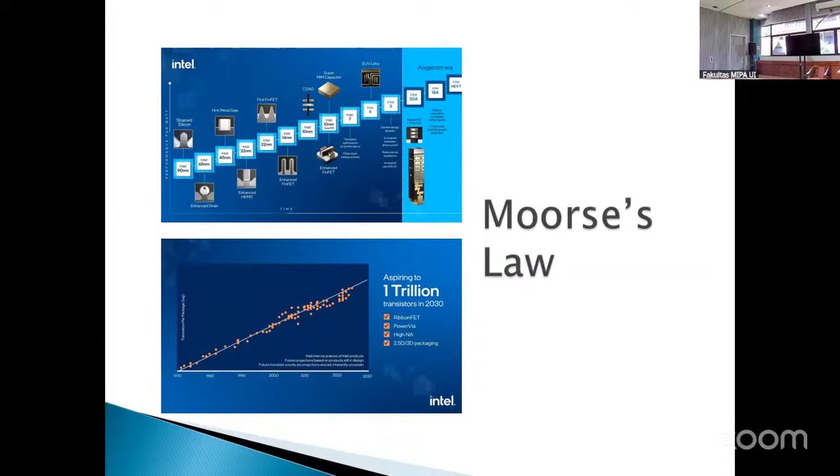That means you need to switch off, then switch on again and let them cool first, right? That's why we have many cooling devices sold in shops. They have a fan blowing from the bottom and so on, to cool down, right? This is the problem we face when you have more transistors in one tiny package. This is what I'm going to talk about today.

As we compare this trend, this side is temperature against density - how much transistor to put in our electronics. Normally we go to 100 watt per centimeter square, but nowadays the power of the processor is more than 100 watt per centimeter square.

It's really high, and comparable to a nuclear blast if the heat is concentrated in a tiny area. It's too hot, that's why we need to manage it. Without managing it, the processor will not stand long and will be easily damaged.

These are the challenges and constraints when we talk about thermal management. We have heat flux in the chip and our equipment increasing tremendously because everything we need is fast. If it's a handphone we need fast, we need a bigger watt power, for various applications - not only in a computer but in a handphone also we can feel that heat generated when you use it, or talk for so long.

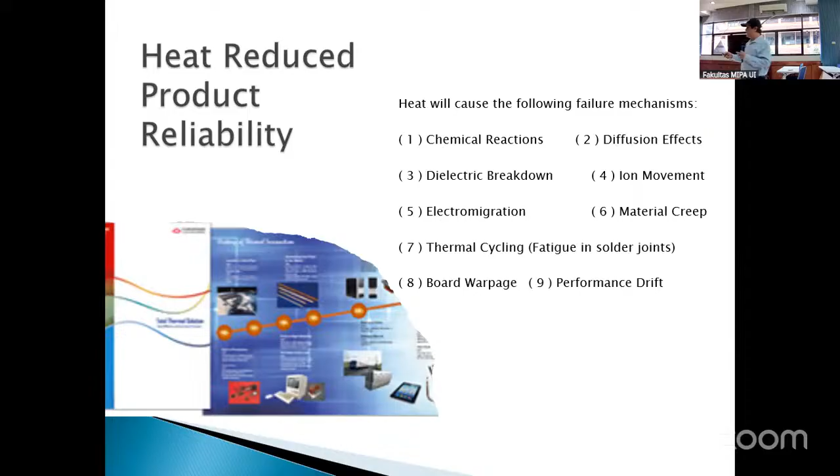And then performance will drift, performance will drop, right? That's how cost is affected by the heat, right?

And then these are in terms of equation, and we call it reliability is 1 minus F. F is what we call probability of failure, right?

Depend on time. Depend on time, the longer it runs, the product will become less healthy until it collapses, right? It fails, right? This is similar to us also, right? We also depend on time, right? When we grow until old, we also collapse, right? This also happens to electronics.

Okay, these are the relationships, these are reliability. It is e to the minus lambda. That lambda is based on activation energy, right?

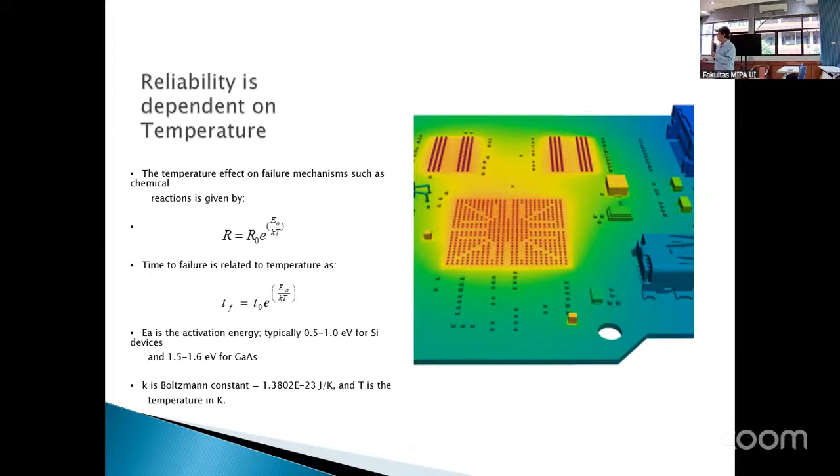This is how the exponential formula works, given by this formula, and these are failure time, time of failure, time at the beginning, and there is EA, and K is the Boltzmann constant - sorry, Boltzmann constant - and this one is activation energy. And then because of chemical reaction, this one will be reduced in terms of time, right?

Okay, all right. These are thermal management. Thermal management is very common in electronics, because we are very lucky - in Penang they have many electronic industries around. I think in Penang about 90% of industry is electronic only. Therefore, a lot of issues are shared with us so we can understand how the problem develops, and then we can contribute some input to them on how to solve it.

All right, this is how it is. The technique is enabled to remove heat from the microelectronic device with or without the need to apply external energy to do this, especially when we try to develop a system. It's possible we want it to be simple and free - free meaning we don't need to put so many parts. That means we have a simple technique, then we can have a low cost in terms of cooling, right?

These are most important. But it's not easy because certain products have different power. Anyhow, you need to have a proper, more expensive system to cool, to drop that - I mean to remove the heat, right?

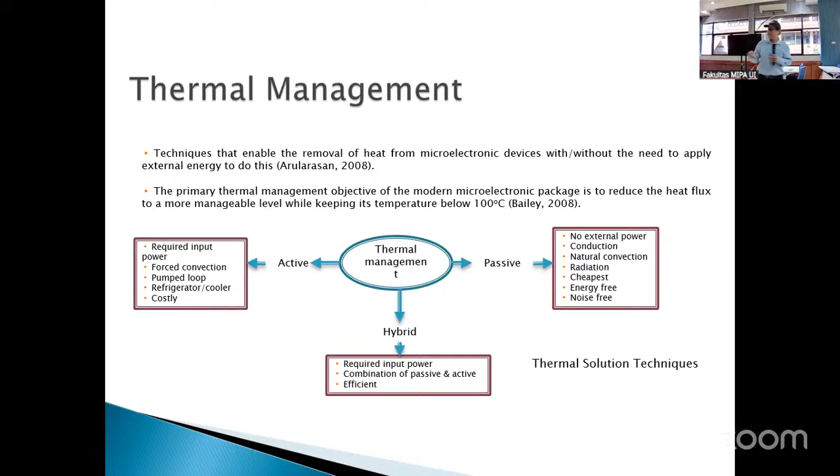All right. Heat transfer and fluid flow in electronics. This we cannot run away from. When you are involved with heat transfer, you must have a fluid inside, right? You must have a fluid involved. Without fluid involved, it is very difficult for you to control the heat, right? Okay.

Cooling of electronics is a heat transfer field that invokes all areas of heat transfer such as these. I think you learned them, right? In physics also I think you learned what natural convection is. These are very simple concepts of heat transfer, right? And then we have fluid flow, pressure drop, extended surfaces, like a fin. A fin we call an extended surface, right? And then we have sensing techniques, empirical data analysis, numerical and computational methods, and heat exchanger design. These are all what you need to know when you are developing a cooling system, right?

All right. Thermal issues. Heat is empirical. You can calculate. It can be calculated. This can be empirical, and thermal prediction within equipment is a difficult task, right? To predict a very complex system is very difficult, right? This is the issue, especially when you have complex geometry, bends, non-uniform component sizes and layout, non-uniform board spacing and heat dissipation, and non-uniform flow and velocity distribution within equipment. This is difficult when it becomes a complex system, right?

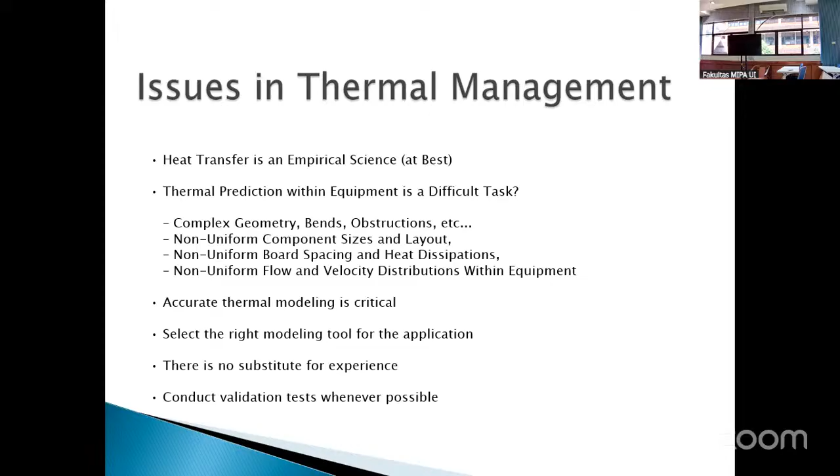Therefore, calculations are very tough. Manual calculation is more difficult, right? Accurate thermal modeling is critical. Therefore, modeling is very important. Simulation is very important nowadays. That's why in electronics they rely heavily on simulation, right? Simulation means using software. And then select the right modeling tool for the application. There is no substitute for experience. Experience is also very important. Use experienced engineers and conduct validation tests whenever possible. You can validate your simulation also, right?

Okay. All right. Thermal issues: we have a cooling system. The cooling solution depends on factors such as heat flux, like I said just now, power consumption, space, weight, reliability, mobility, integration, maintenance, noise level, and cost, right? All those are important when we design. Consider how big the system is, how constrained your device is when put in the enclosure or whatever, right? That is all important. Operating costs are also important, and we need to look at them.

And then how much the build cost is. It cannot be too expensive, because if it's too expensive, your product goes out of the market. People don't want to use it because it becomes expensive, right? And then product lifetime is also very important. Make sure it's longer. And then we have consumer acceptance. People must like it. The outlook must be nice also, right? This is what the engineer needs to consider and take care of. These are thermal issues that need to be designed properly to make a proper thermal solution, right?

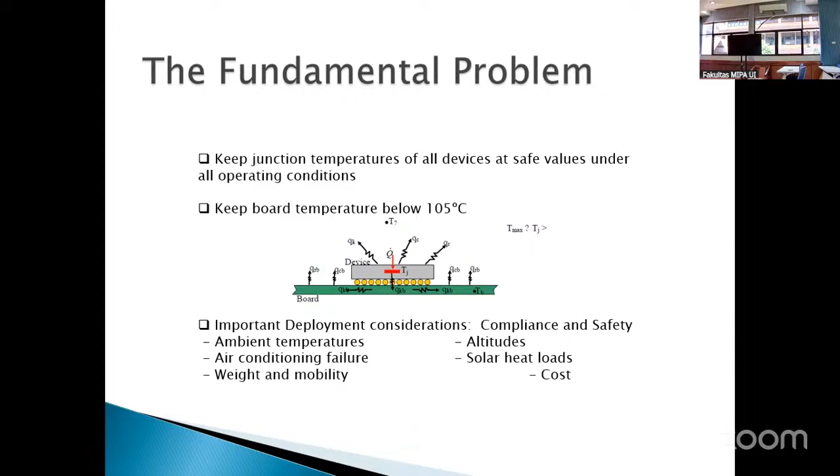This one. This is junction temperature through Q1, right? This is Q2 through the board, right? This is how we need to calculate this.

And the most important thing is it's often difficult to separate the amount of heat flowing through these two parallel paths. To overcome the difficulty, we define the net thermal resistance, the thermal resistance from the junction to ambient. The formula is: thermal resistance equals Tj, temperature of junction, minus T ambient, over P, the power of the package.

If you know that, then we know the total thermal resistance of that particular package. This is how companies measure it. First, they want to predict junction temperature. After that, they will know the thermal resistance for that particular device. When they know that, we estimate how much cooling they need to reduce the resistance. Conduction and convection you have in parallel. I think you know, right?

For this resistance, we assume it is a Fourier-type equation. Therefore, you can make a resistance type of representation, right? This is from the junction, this is convection. This is how they represent the junction to ambient.

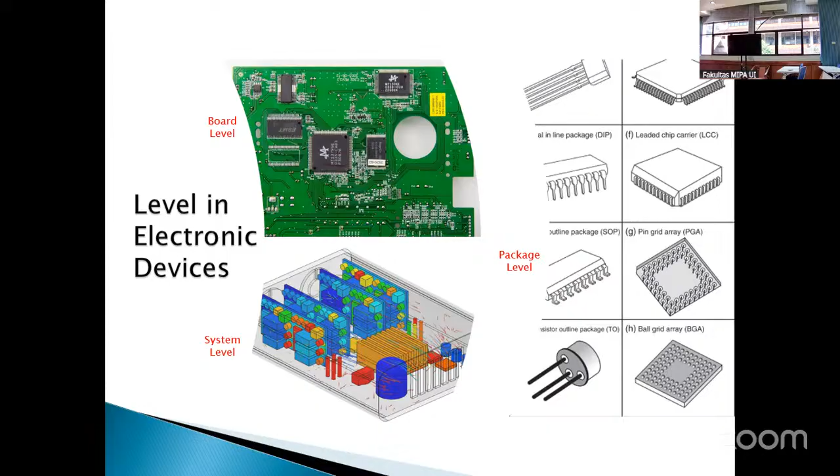Okay, I want to touch a little bit on what I'm doing in USM. These are some of my ongoing projects, especially the effect of heat sink, heat pipe, and reflector on PV solar cell cooling. And one of my PhD students works on experimental and computer simulation of multi-piezo fans with different configurations, which I'm going to touch on today.

And then experimental and computer simulation of synchronized piezo fans. Piezo fans can be synchronized to optimize heat dissipation. We also have a study on notebook PC cooling. Your notebook has cooling underneath; for high-power computers they normally have heat pipe cooling. There's a study on a fin loop heat pipe with nanofluid, the study on heat sink, heat pipe, and reflector on solar cell cooling, and lastly I'll touch on lithium-ion battery cooling.

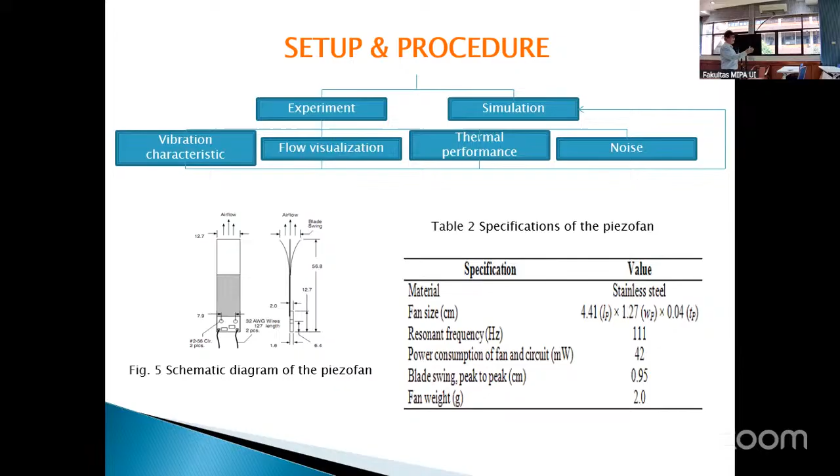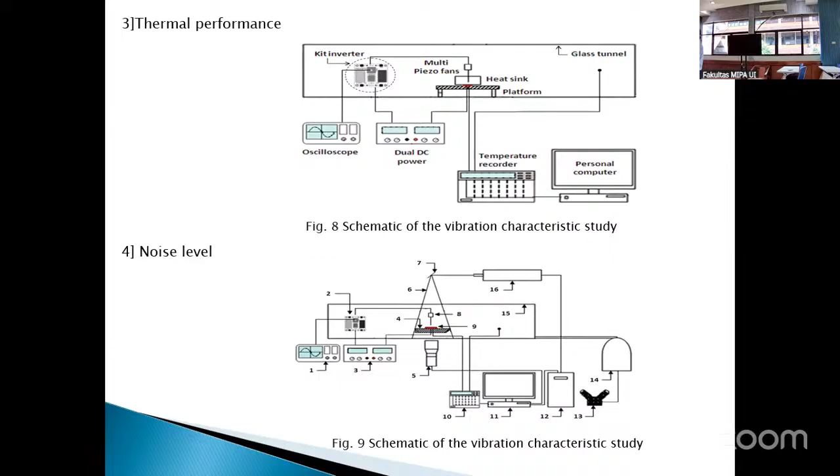Okay, and then we measure thermal performance, right? We have a temperature sensor, a thermocouple there on the plate, right? And then we also check the noise level with a laser vibrometer, to check whether the noise is as low as we require. We test this particular piezo because we want to know the configuration of the piezo, how big the flap, how many fans we want to use and so on.

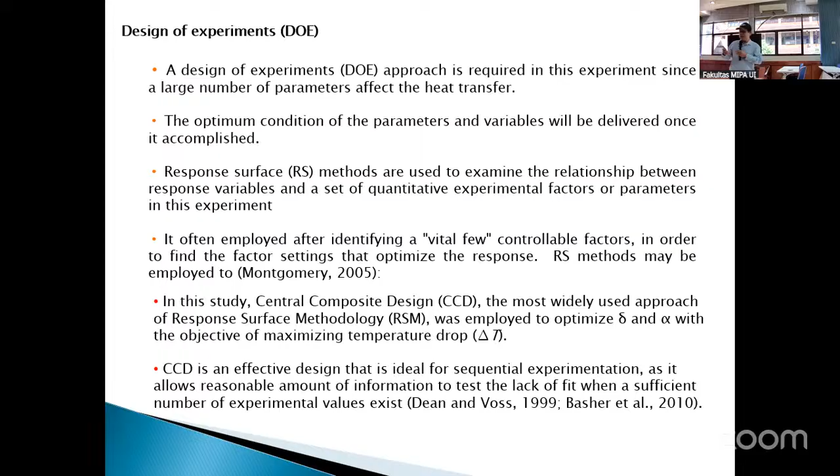Okay, we also do some DOE, right? DOE is an optimization technique, right? To calculate what is the optimum in terms of distance from the tip of the piezo to the surface, and then also what is the amplitude and so on, right? We can use this DOE to calculate for us.

All right, this is the formula we use, right? Basically, because we involve heat and fluid, we need continuity, momentum, and also, because the temperature is there, we need to have the energy equation also. And then we have solid mechanics, because it is solid, deformation and so on, so we need an equation for the solid. And because the flow is turbulent, we give a turbulence equation there, right? We supplied it inside Fluent.

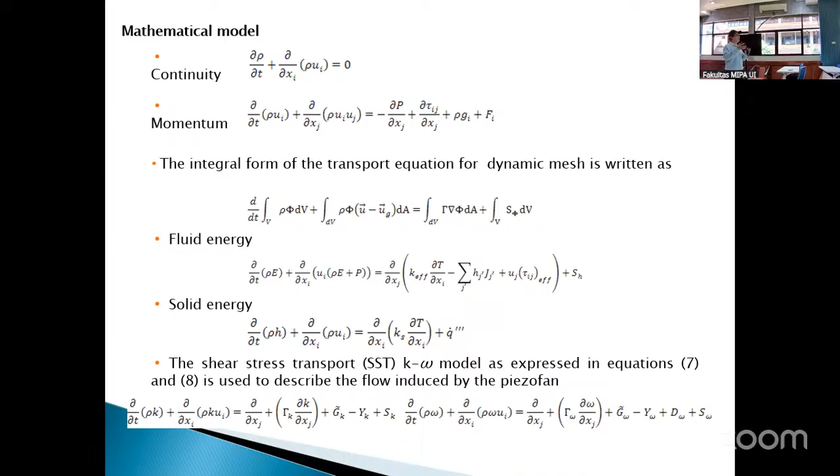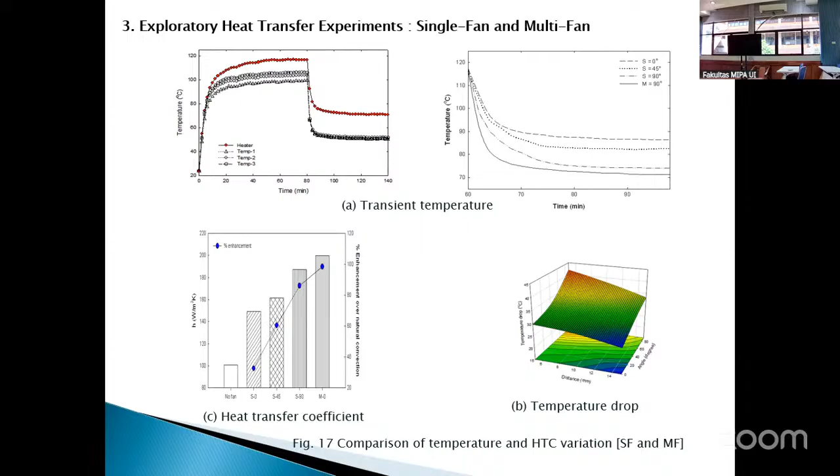These give the temperature drop at the optimum condition. Therefore, we do DOE, and then we can find what is the optimum. These are optimum for that particular setup. All right, this is the result we got from experiment and also DOE. We run the experiment and then we use DOE, and this is the optimum value we got, based on that setup, right?

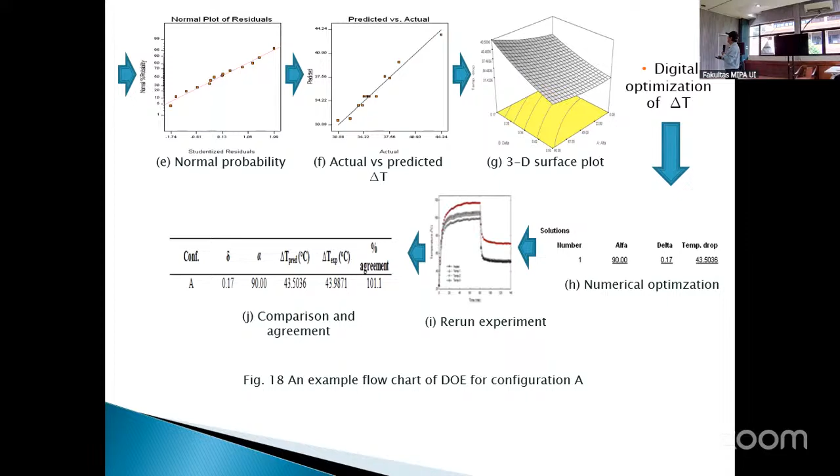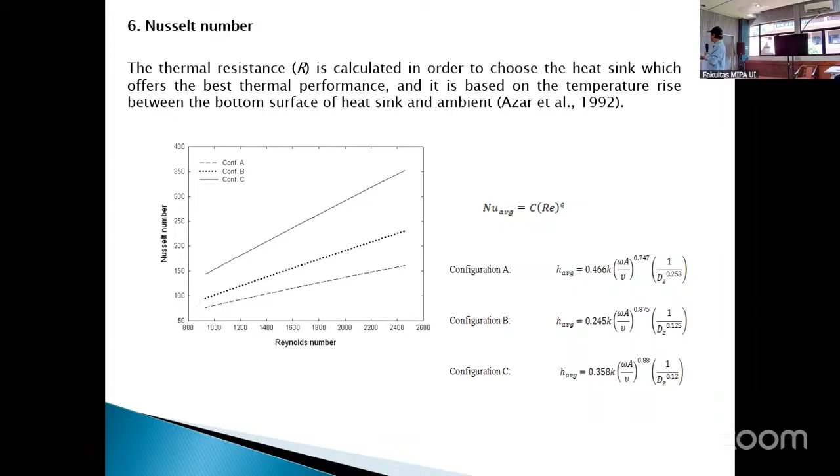Comparison with traditional heat transfer removers. All right, we see this is the rotary fan. These are piezo, right? And then we can compare. The fan is a best case, an axial fan; with this one, the piezo fan significantly reduces power consumption compared to the axial fan, saving up to 3 to 4 times in terms of energy, right? Power utilized, right?

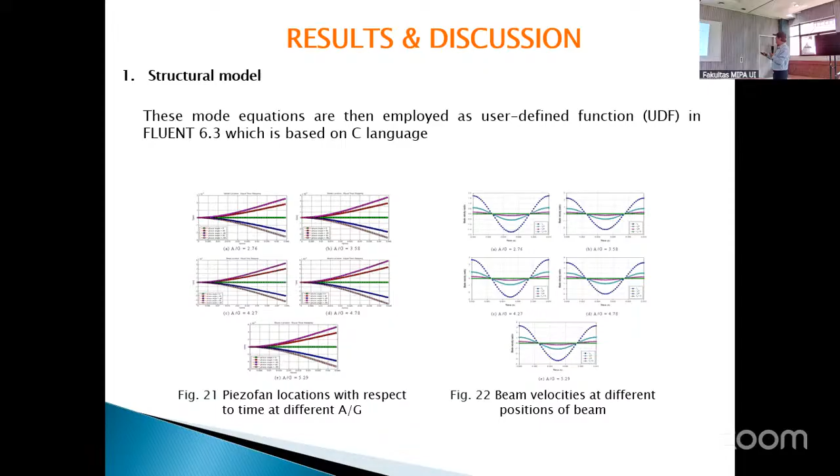And then we also can play with mode, right? We have different modes also. We have a user defined. We can play with beam velocity, position, or different amplitude, and then we can see what is the beam velocity and different position of the beam, right? Through vibrometer, through a simulation.

Sorry. We also can utilize flow visualization, how the flow looks like with the flipping piezo, right? These are on the plate itself. These are single blade. We can see these are double blade, right? And then we can see that the heat transfer coefficient for multi has a value of 311.12 watt per meter square, while the single fan only can produce 289.57. That means by two fans, multi fan, you can improve the heat transfer coefficient, right?

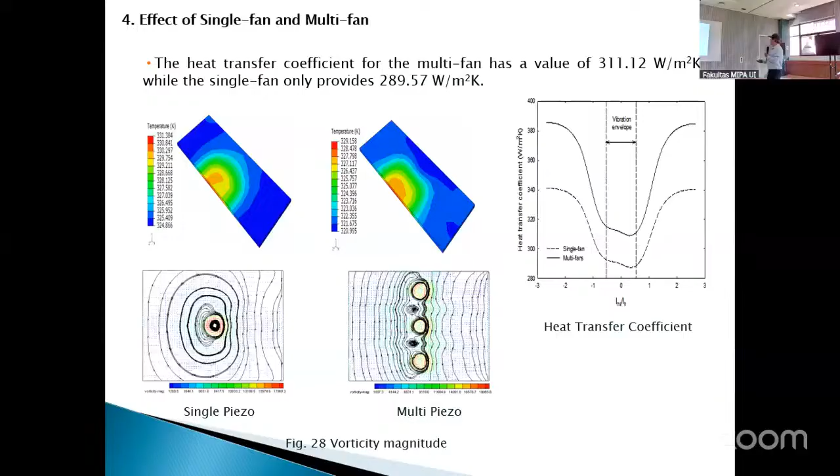Also, we can look at the effect of the tip gap between fan tip and flat plate. We can see also how much effect: a significant increase in vorticity, more than 218%, right, is observed for the multi-fan piezo case compared to the single fan, right? The smallest gap, 0.03, yields the highest convection coefficient, right? That's what came out of the results from the experiment and also simulation, right?

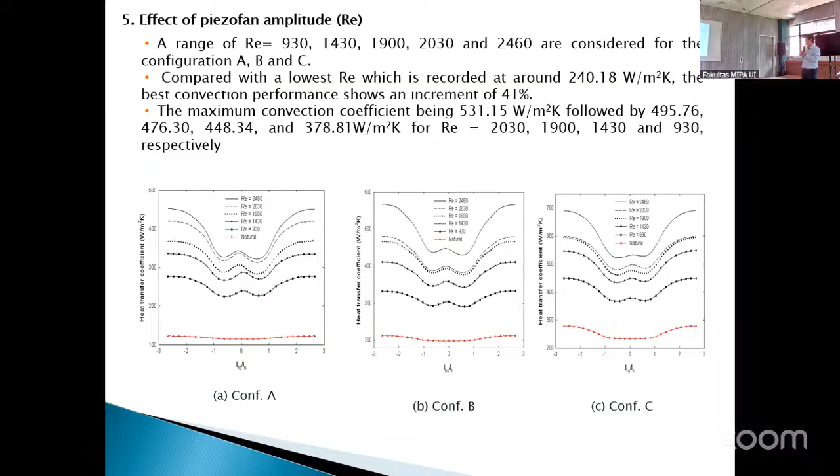And then we can play with a lot of things. We can also look at the effect of piezo fan amplitude with different Reynolds numbers, okay? And then we can plot configuration A, configuration B, and configuration C, right? And then we see that configuration C gives higher and better performance, right? To reduce the heat, right?

And then also the effect of the fin configuration. With a multi-fan, the obvious configuration outperformed. Heat transfer coefficient decreases as we move to the heat sink center. And then we know that the average convection in configuration B is 28% higher than in configuration A, right? That is how we can come.

And then we also can see the comparison between experiment and simulation is quite acceptable, right? In terms of variation at configuration A, configuration B, and configuration C. In terms of heat transfer, also we can see quite acceptable, right? In terms of comparison, right?

And then nowadays, we also can apply the piezo fan, and then we can design the fin. Just now we used only one without fin, and then second fin, and then also four fin. Right now we have different types of fin we can play with. Therefore, we can have also different rotation, a different orientation to cool the heat, I mean the package, right? With a different fin configuration.

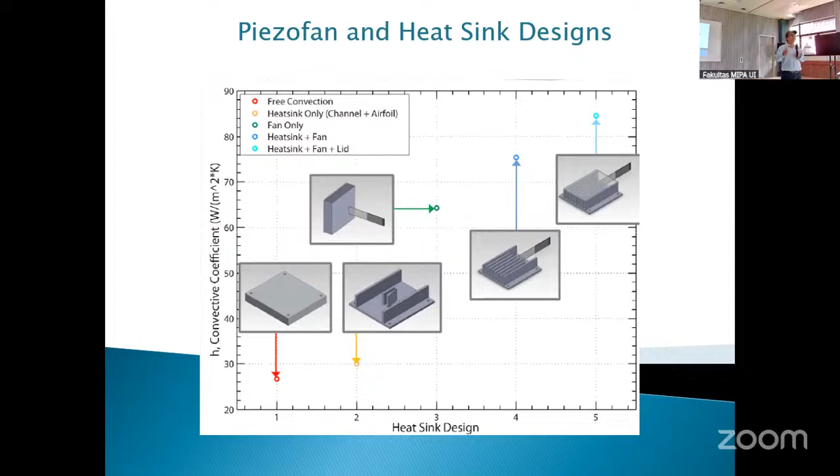Therefore, there are very many things, I mean, more orientation that we can explore in future study, right? Because we can redesign the fin to accommodate the piezo itself, right? That's what is good about this piezo fan, right? All right, this is a new fin. If you can use a fin something like that, then of course we improve in terms of heat transfer coefficient, right? That's why fin design is also crucial, right, to accommodate the piezo fan, right?

Okay, now the second one I want to touch is about synchronization. Just now was without synchronization. All right, what is synchronization? If you see a fin like this, right? If you flip like this, if you have two, you can do like this, or you can do like this, right? This is synchronization. How do you need to synchronize? Which synchronization gives a better heat transfer coefficient, for example? Right? That is what we are studying.

Right? Now, of course, one of the PhD students also studies the synchronization of the fan. All right. Again, these are all the issues that I already touched. These are the problem statements.

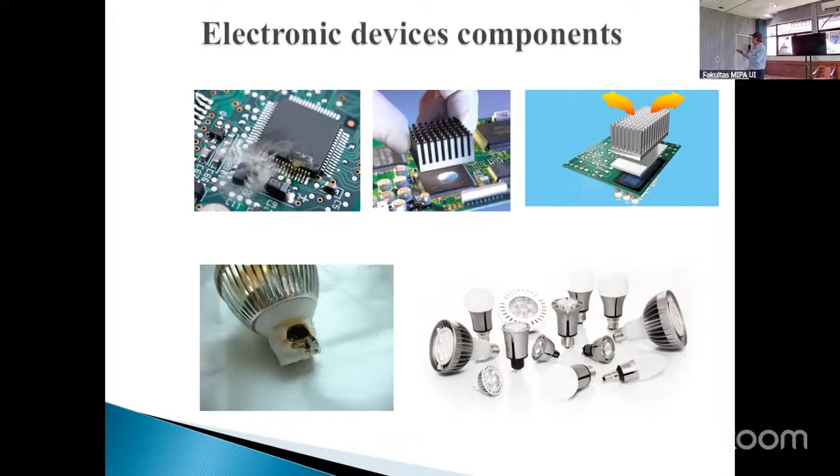Of course, we want to use cooling, right? This is the problem we come across when dealing with heat. We damage all those devices. We can make the life of a device very short if you don't control the heat very well.

This can be applied in various applications like LED TV and so on. This is the fan we use, whether you use a bigger blade or smaller blade. You can choose the size suitable for you. If you compare, it is very small—like a 20 cent coin compared to a piezo, it's very small. You can place it in any small place.

This is my setup to make a synchronization. This is the piezo, and then we use a synchronizer. These are laser vibrometer—sorry, this one is the laser controller to control the laser flipping to check. This also is what we call the vibrometer, to check for this one single, this one double.

We want to use PIV, and then we will reflect the laser light to check the flow. And this is the synchronized meter. We use this one to make it synchronized.

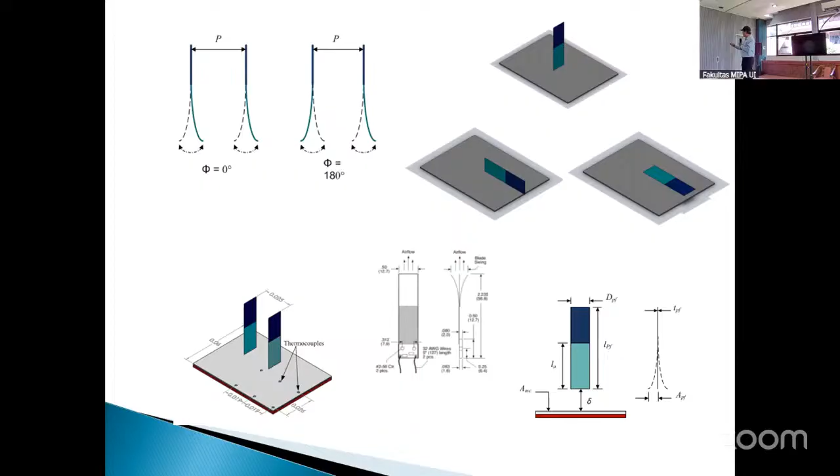In this particular case we try to cool the LED light, because the application is to use in the TV screen board. At the back here we have a piezo, because here is all LED, the TV. So therefore we try to make it LED, and we mimic the LED. This is my LED, and we study this, and put it at a different location. We study a different orientation, and we also study a different synchronization.

So we make up 2 and 4 conditions like this. 2 and 4, and then we make the piezo work now. And then we do some simulation also, we come up with a simulation.

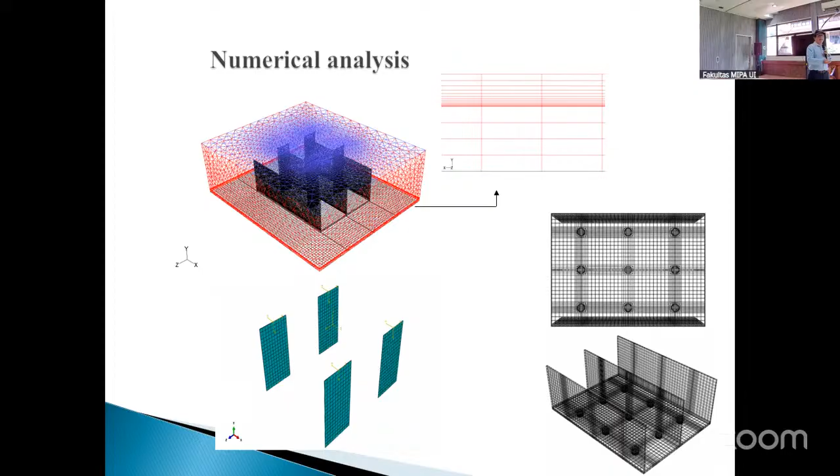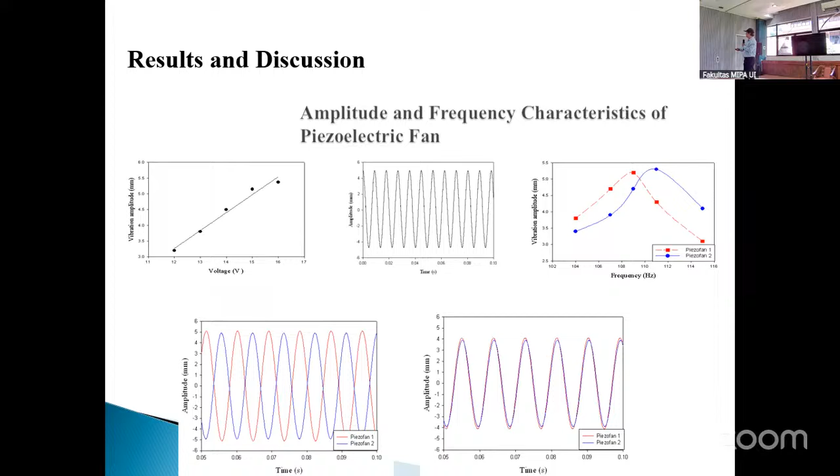And then synchronization takes place. This is what we call zero synchronization, this one is 180 synchronization—out of phase vibration. Sorry, this one is out of phase, and this one is in-phase synchronization.

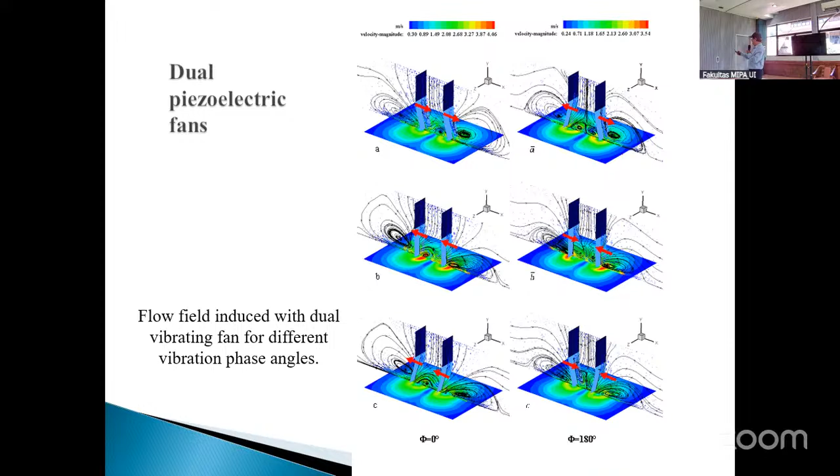This is mainly what the project is about. We can see the orientations A, B, and C. We can also check comparison: A gives a higher amplitude, B gives a lower amplitude, and the lowest one is on orientation C. Sorry, my eyes aren't that good.

We use a double fan, this one therefore 1 and 2. We can see that the synchronized one, meaning in-phase synchronized, gives better cooling compared to the out-of-phase synchronized. Compared to a single fan, it's much higher in temperature. In-phase gives higher performance in terms of heat transfer, and the worst one is a single fan. Even the heat transfer coefficient shows the same thing.

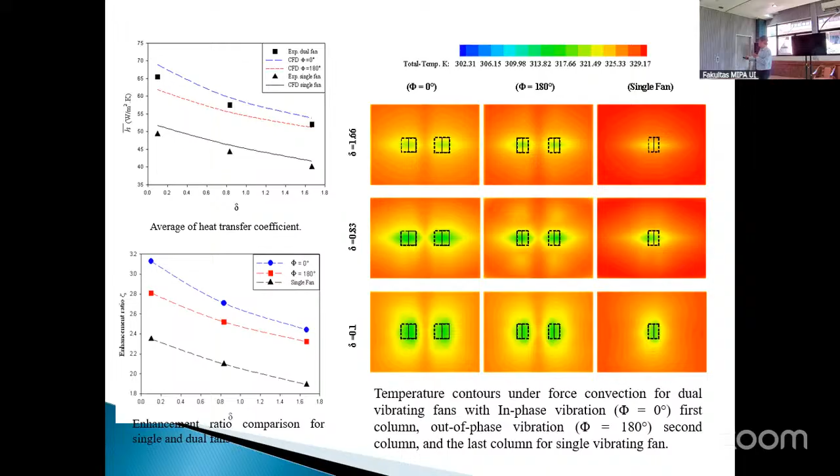We can also see the Nusselt number and enhancement ratio. This shows good heat transfer, and we can also automatically get a better Nusselt number. We can see that effectiveness also becomes better there, for that particular position.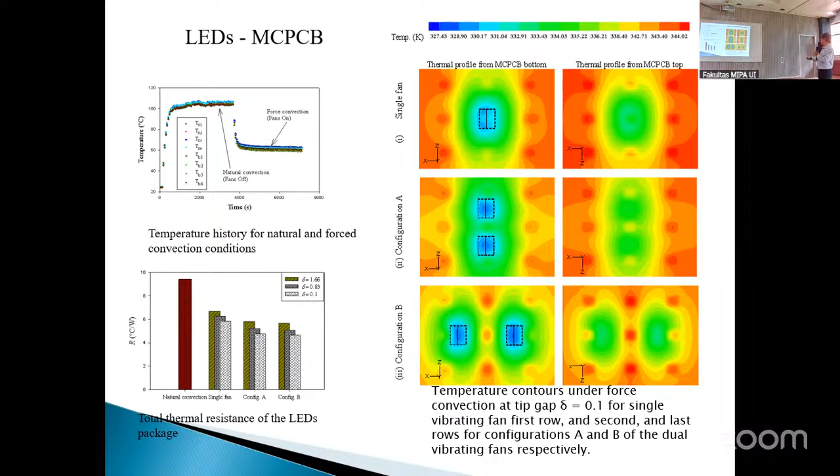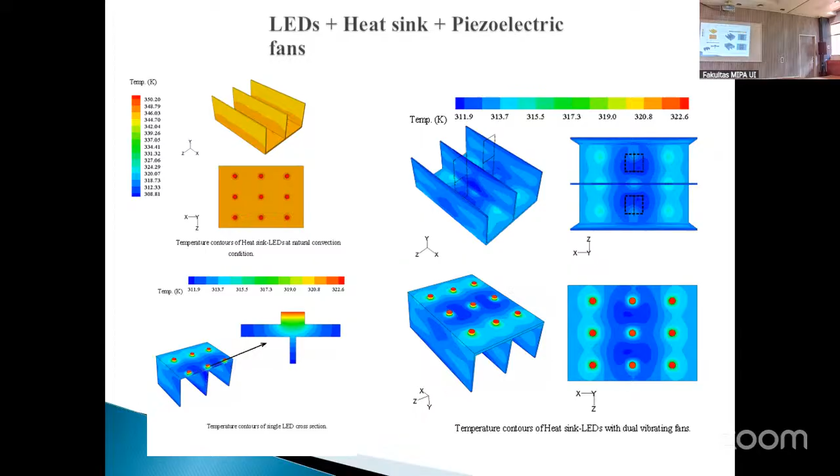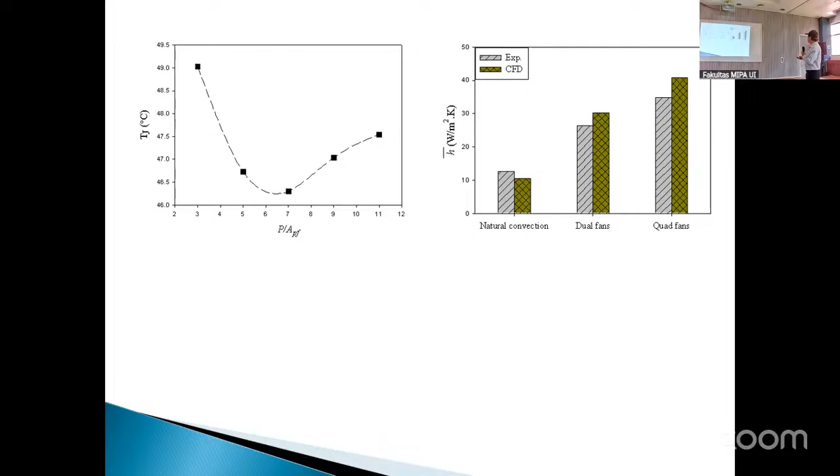Let's see, these are similar. This is the comparison of heat transfer coefficient between experiment and simulation, giving a quite reasonable result. This is how we can get it. Similarly, these are representations of the simulation heat sink, where the temperature varies along the surface.

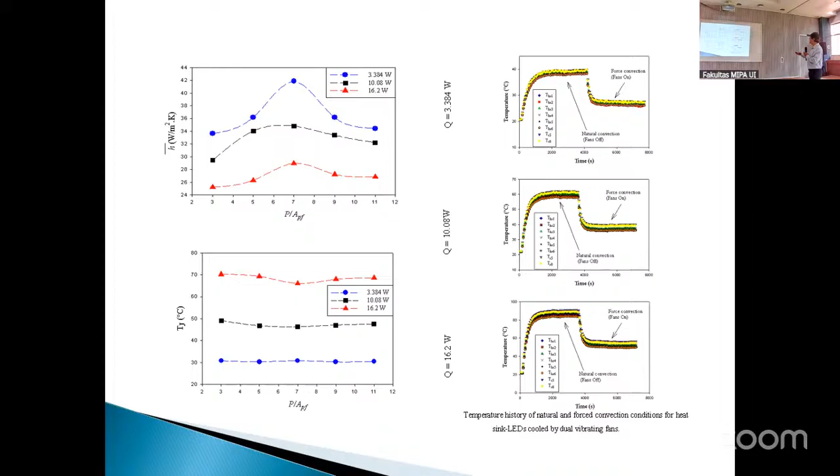We also have many heat transfer coefficient and junction temperature results collected, and we can observe that with higher watt, comparing different wattages: 16, 10, and 3.3 watts of power.

In conclusion, the minimum tip gap offering will provide the best cooling performance. In-phase vibration, meaning synchronized, due to reduction of viscous drag, could further increase the vibration amplitude, whereby the smallest amplitude is detected at the out-of-phase vibration at 180 degrees. The fan enhances performance within approximately 2.3 times of the heated surface.

By contrast, the dual fan enhances heat transfer performance within approximately 2.9 times for the out-of-phase vibration, and 3.1 times for in-phase vibration. The characteristics of the assembly heat sink cooled by dual and quadruple vibration fans have been investigated, comparing between 2 and 4 fans.

This is about some of my publications from the piezo fan research. Now we are going to talk about some of my work related to...

Excuse me, maybe we can stop here and give some time for questions and answers at the end. Yes, please.

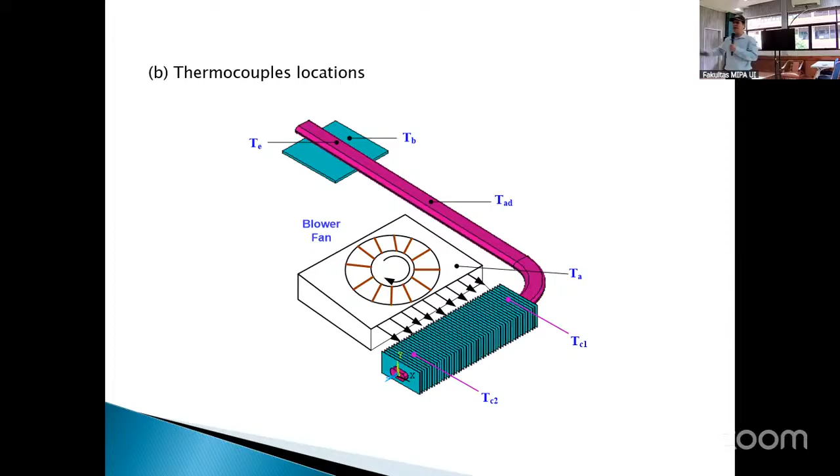When the steam or vapor comes here, the heat will be dissipated from the condenser and it becomes liquid. When it becomes liquid, the wick carries it back to the evaporator, and the process of cooling and heating continues like that.

Alright, this is the characteristic of our L-shaped fin flat heat pipe. These are the evaporator length, these are the condenser length, and the adiabatic length - the adiabatic length is in between the evaporator and condenser. This is the width and thickness, and the outer diameter is this one. These are all the characteristics and dimensions for the heat pipe.

This is how we do it. We put the heater at the bottom of the evaporator because we want to control the power. We can control the power and then control the heat, the temperature. We monitor and take the temperature of the evaporator and the temperature of the condenser using this computer and DAQ, and we also have a fan. The fan speed can also be varied. This is the setup - a very simple setup.

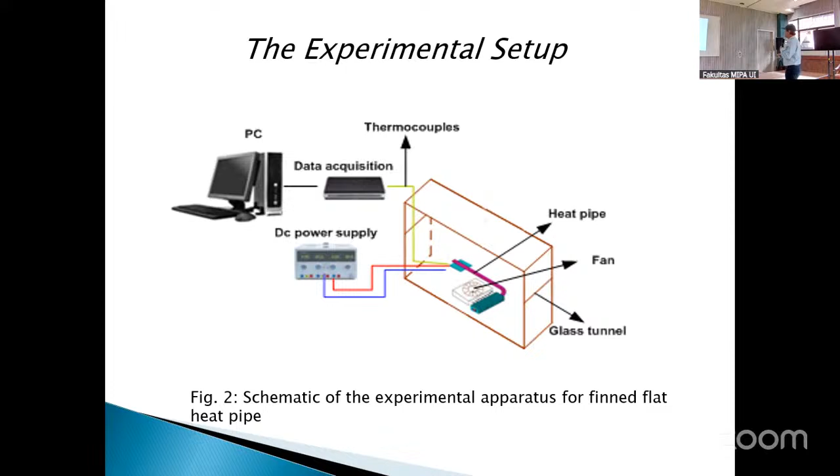We do it, and then we do some measurements. This is the parameter that we're going to calculate. Actually, we want to know what is the base resistance, what is between base to the evaporator pipe again - thermal resistance for the heat pipe, RH, is a similar one.

Okay, this is in terms of total resistance. This is how we represent it in terms of electrical resistance. And then we can also calculate - first we calculate the K effective. K effective is just to study the optimization, how much we can optimize in terms of the size of this heat pipe.

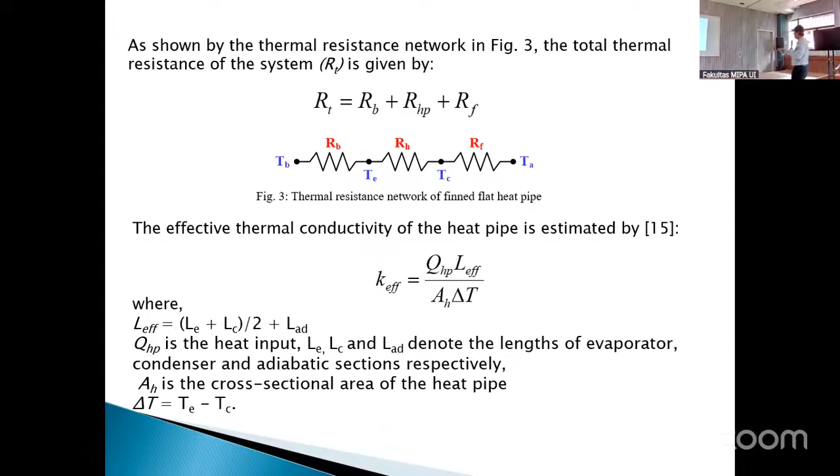And then we use DOE when we have experimental data, and we can calculate the optimization using DOE by central composite design, and we also do some simulation.

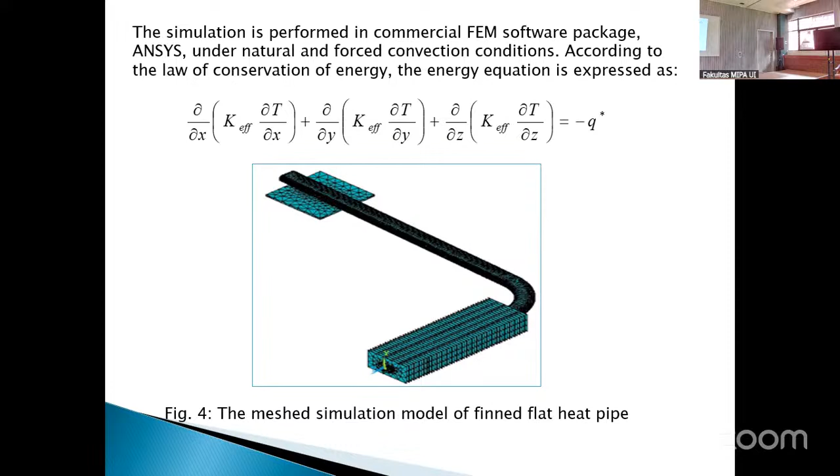We have a fin, we have the evaporator there, these are the condenser, and there's an equation. We assume the K effective - we don't consider the liquid inside yet, at the beginning, just to make it three-dimensional. If you consider three-dimensional with liquid evaporation, it takes a lot of computer time - it's huge and more difficult to simulate.

These are the equations we use - continuity, momentum, and energy. We also consider liquid wick for this. When we consider 2D - we do it 3D for K effective, and then we make it 2D for vapor, as a separate simulation, because it's too complex. So we do continuity, momentum, and energy, and calculate those equations.

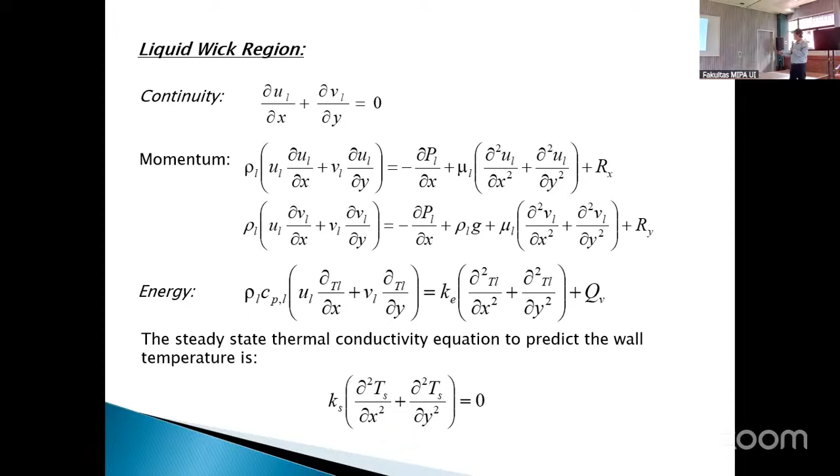Right. Okay, this is the equation we're going to consider during the simulation, right? These are the boundary conditions we use, and all those velocities and so on, for the simulation. This is the evaporator part, and then we have a condenser part. These are all those solid-liquid interfaces, right?

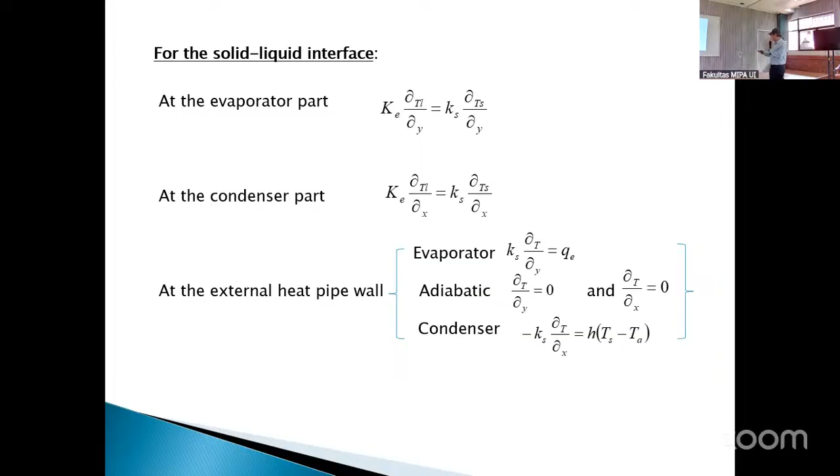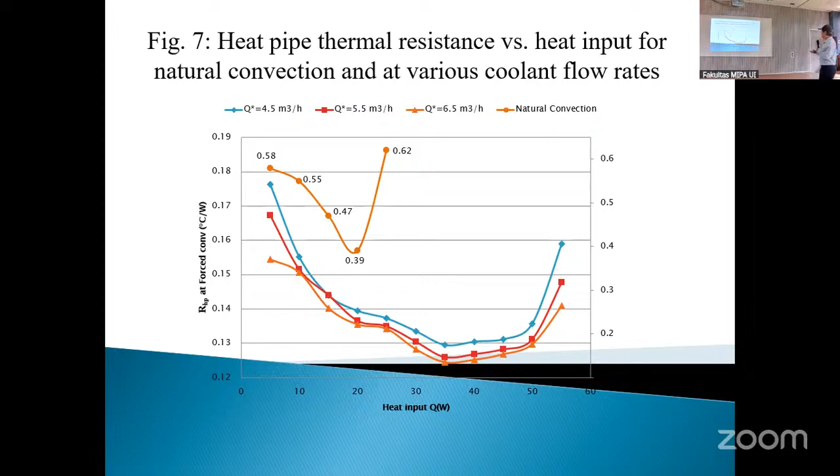Okay, and then heat pipe resistance versus heat input for natural convection and at various coolant flow rates. Natural convection gives higher resistance, right? At different air flow rates. This is heat input. And then we see a similar result. The highest flow rate gives the lowest RHP, based to evaporator, right?

This we use our DOE. We do some check in terms of optimization. We have heat input as A, coolant flow rate as B, and we see what is the optimum value, right? This is the optimization solution for heat input and coolant airflow rate. This gives the highest effectiveness. We see air coolant this one, and then heat input will be lowest at one, right?

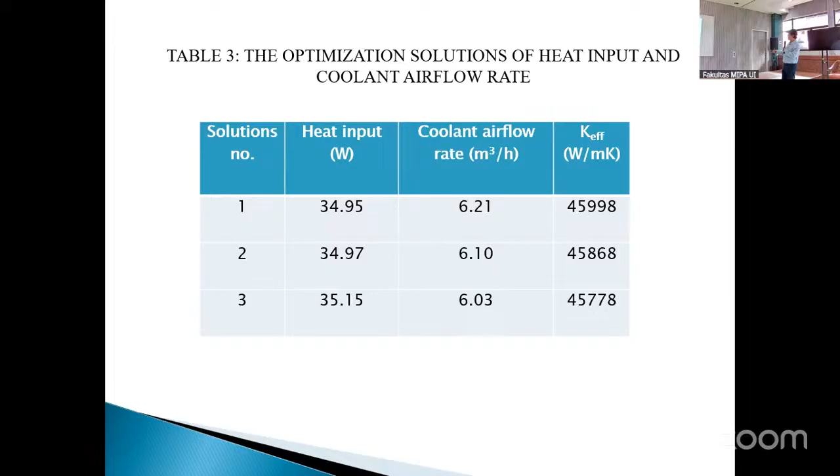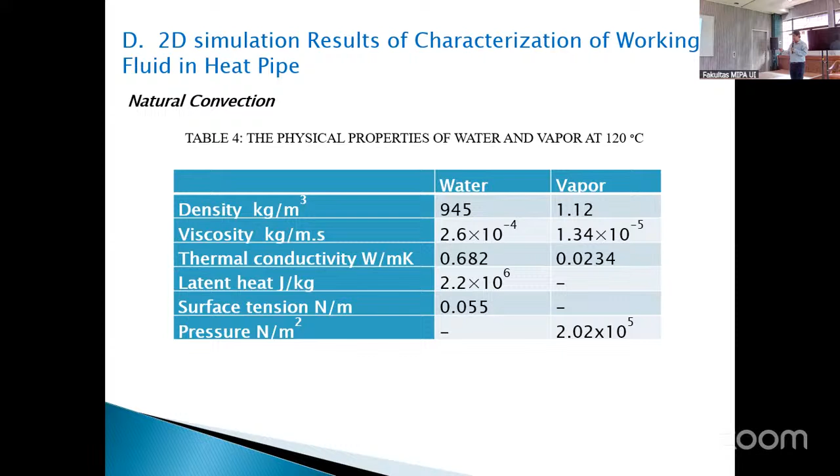This is more on the heat flow inside the heat pipe, right? We have density of air, density of water and vapor, right? We put it into Fluent, and then we can see this is the wall temperature of the heat pipe, only 2D. And then we compare with experiment, and it gives a very comparable result, okay.

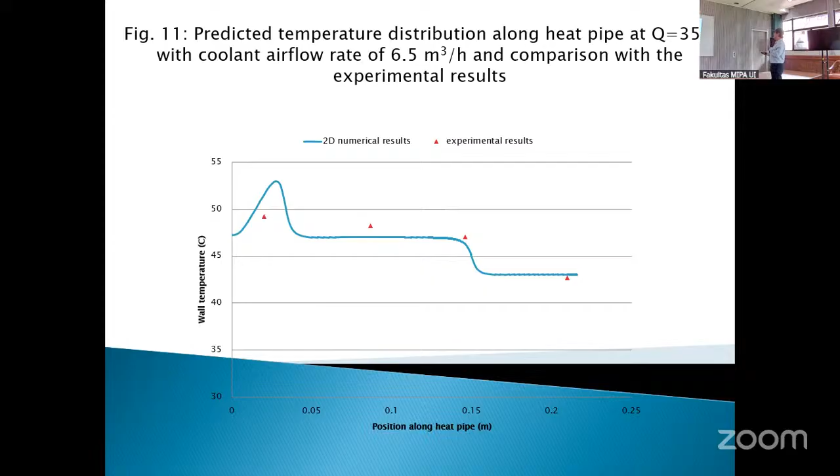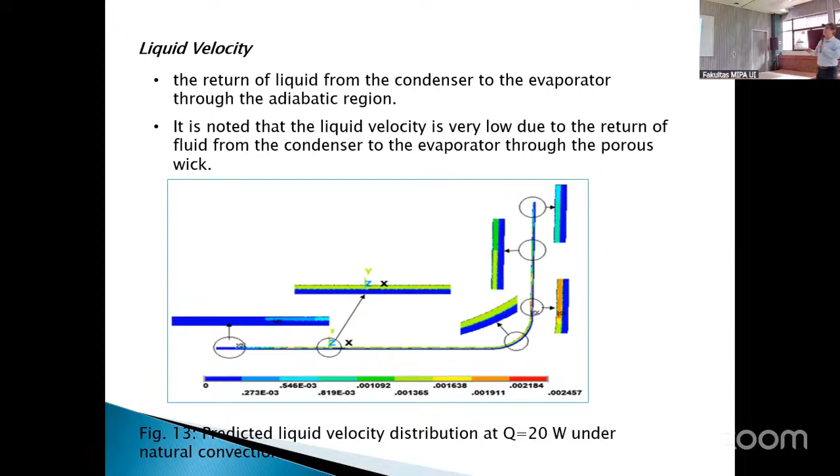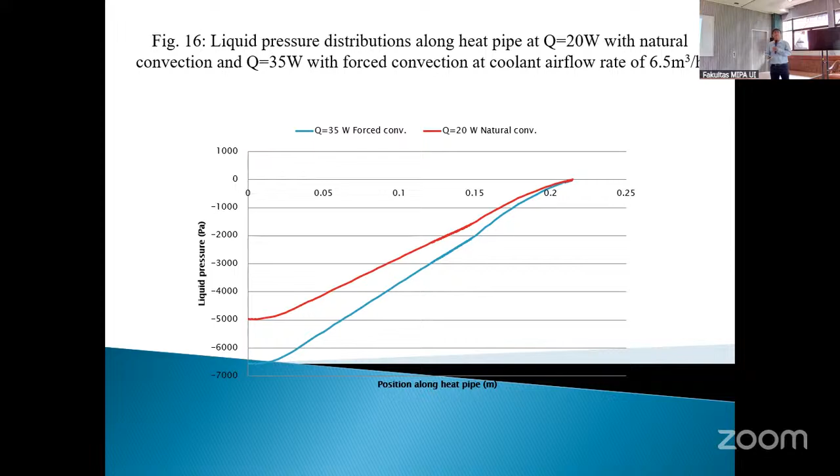I think we also can check the velocity between steam and water, its flow. We can measure it by the simulation. That's why simulation is very useful for us to get more detail, more understanding of the physical behavior of the fluid inside. We can also see vapor and liquid pressure, varying from evaporator to condenser. Because we set zero at the condenser, of course it will be zero there. We see a pressure drop inside the heat pipe, right?

This one just now is naturally induced steam. This one we use a pump to pump it, and then we have a heater there, right? And there is flow. This flow, we can use a different fluid now. Whether we use water, or you can use a nanofluid, or you can use any fluid, right? But now we focus more on the nanofluid. We want to put nanofluid inside this one.

We want to see how effective the nanofluid is to cool this evaporator. This is the main task for this project. Okay, this we use clear pipe glass, and then we can observe these are pure water, and then we can see that at 20 watt we see bubbling in terms of water.

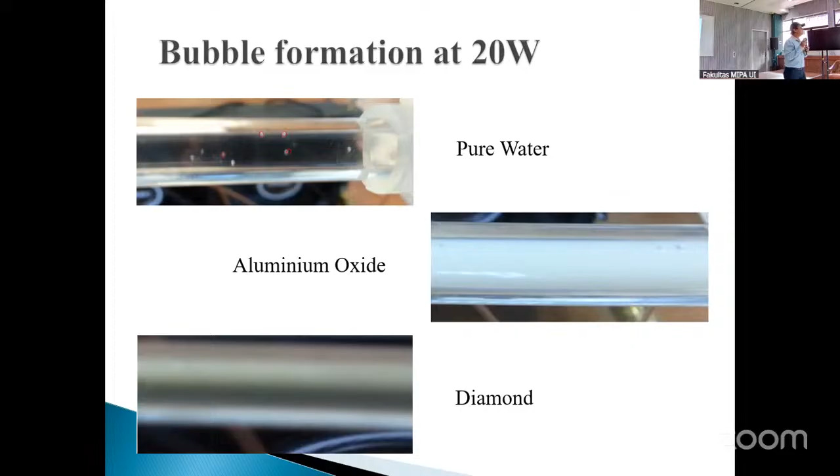But when it comes to nanofluid, with alumina we cannot see that. And with diamond, also we cannot see. We put a diamond, artificial diamond, not real diamond. And then at 40, we see very big bubbling for the pure water, and then with aluminum oxide we have a small bubble, and diamond also very small bubble, right?

We can compare how the nanoparticle inside the nanofluid can absorb the heat compared to water, which doesn't have a particle there, right? That's the system. This is the evaporator. The heat pipe passes through like this, and then these are the condenser, right?

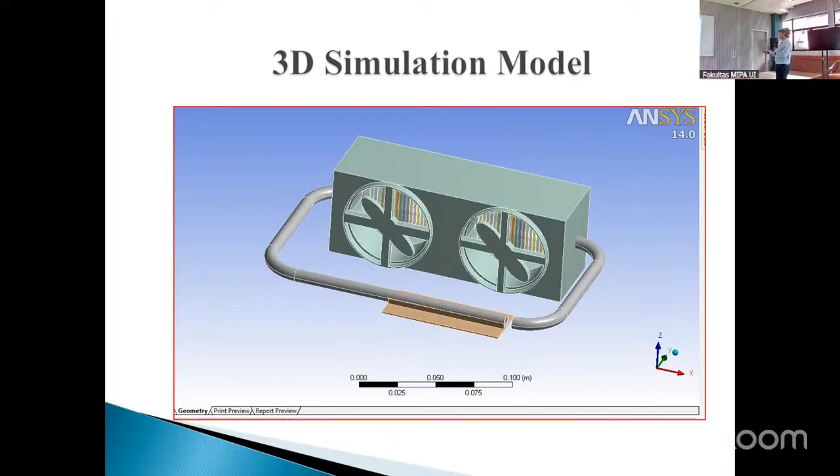We have a fan to blow, and then based on simulation we can see the evaporator go like this, and then it becomes cool, and then again feeds back, and we can see how effective the nanofluid is compared to water, whether it is alumina or diamond. And then we can see also how the nanofluid can distribute the heat inside, compared to diamond, in terms of heat dissipation.

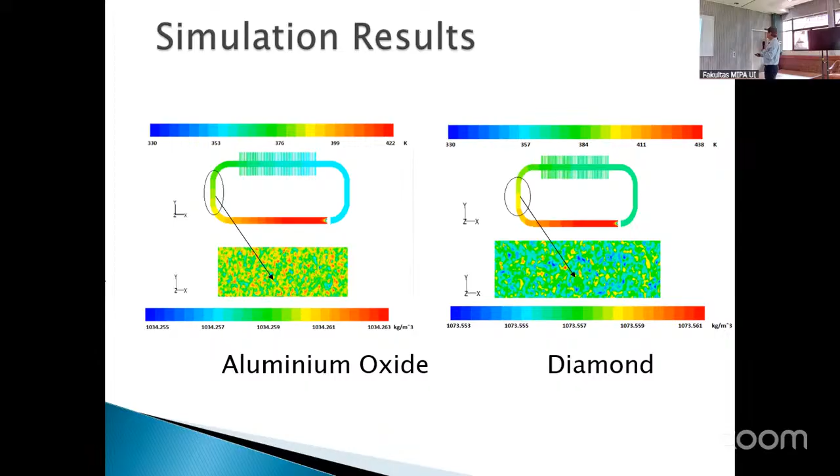Then we measure the experiment and the simulation. We compare with pure water. We see the temperature of the base one is higher, and the diamond is lower compared to them. That means diamond is very good for cooling in this particular setup. And then we compare the simulation, which also shows a similar result. The diamond gives a lower temperature compared to water and alumina.

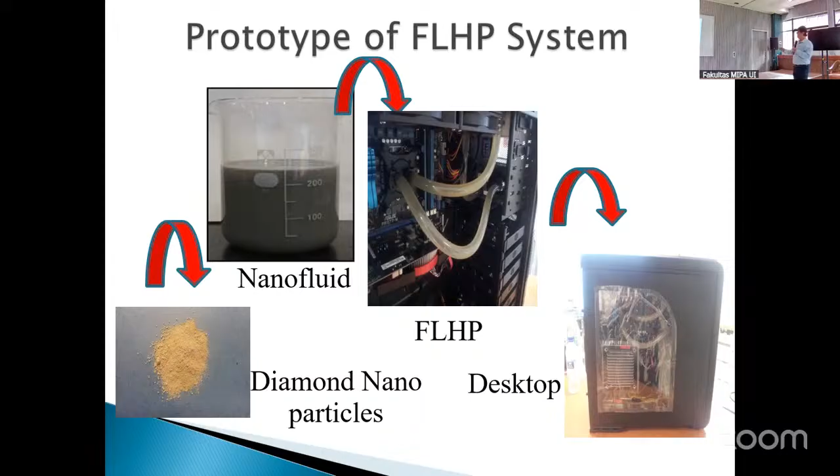My student's computer, not my computer, actually. To use as a cooling medium for the processor, with no need to use a normal heat pipe. Okay, they put it in. All right, we did some publications also with that.

Nanofluid heat pipe. Okay, any questions? That's finished for heat pipe before we go to solar cooling. We have another two, solar and battery cooling.

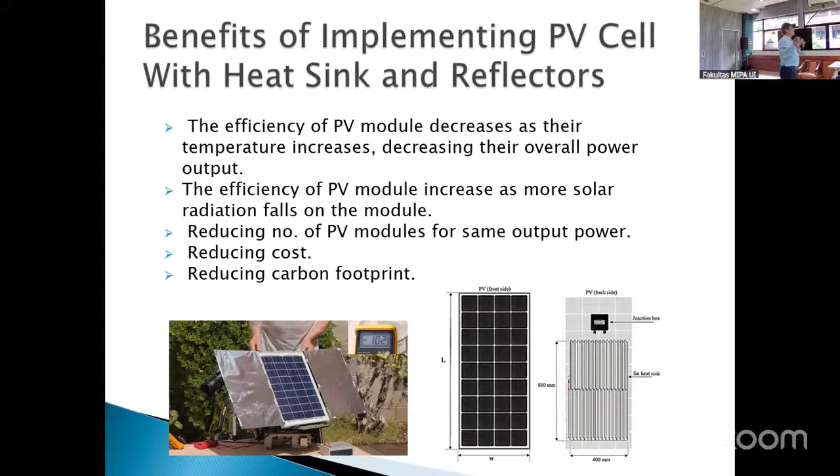Okay. Temperature increases, but again, when the temperature increases, the efficiency of solar will be reduced. When the solar panel becomes hot, efficiency is reduced, decreasing the overall power output. The efficiency of the PV module increases as more solar radiation falls on the module, reducing the number of PV modules for the same output power, reducing cost, reducing carbon footprint. Right? This is how it is if we put the reflector, right?

Okay, this is the fin. If we put a fin, we know that when the solar cell becomes hot, if we can reduce the heat, then we can improve the efficiency. Therefore, the fin is also important if we want to study how to cool the solar panel, solar cell.

The sun also varies, because I don't know about Indonesia, but in Malaysia normally we have good sun between 11 o'clock and 3 o'clock. This is the period we can get more solar, right? But maybe here it is also almost similar, right? Same region. And then we try to position the reflector better to make sure the sun falls on the solar panel, right? Okay, this is the study.

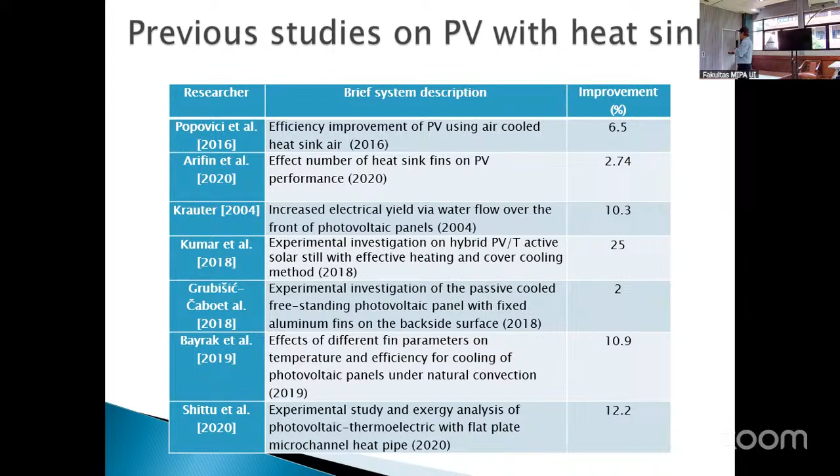Now we want to study that again to see how this can give us reduction or improvement. Right? We use a solar light of 782.5 watts per meter square. For this we use a halogen lamp, right?

The halogen lamp is just to mimic the sunlight because we cannot do it outside, right? Because for the students it's a bit difficult. Sometimes the sun is there, sometimes it's not. It's not regular. It's quite tough.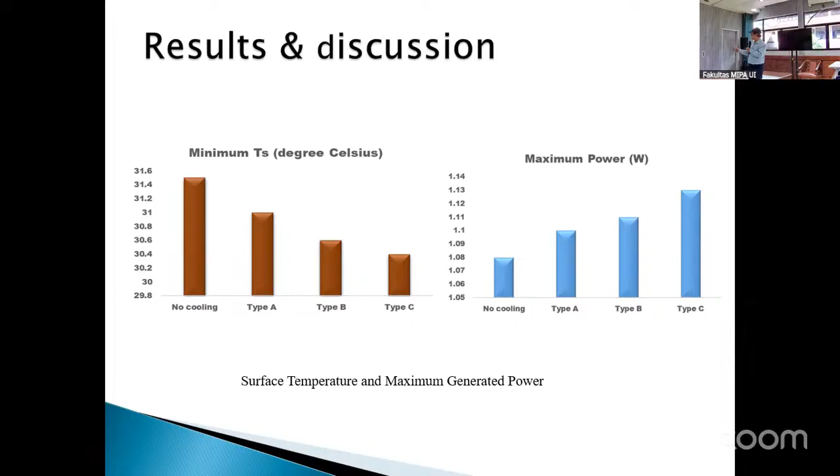And then we check the temperature and maximum generated power from no cooling to type C. In terms of surface temperature we see a significant drop, and the power significantly increases, right?

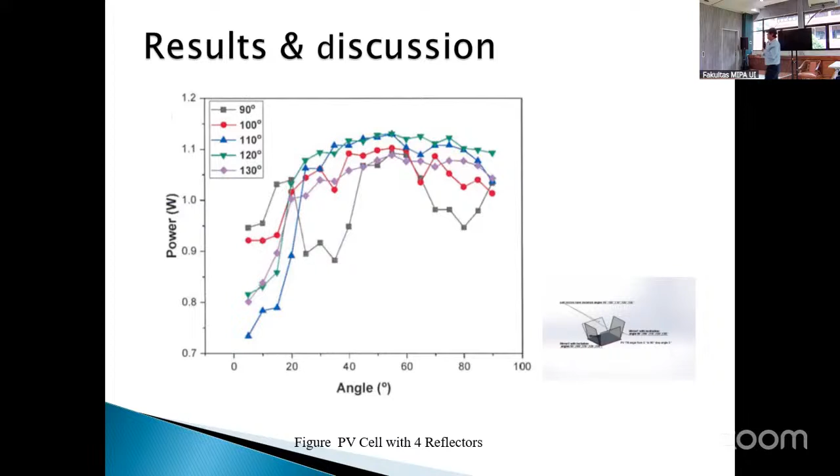And then if you use 4 reflectors, just now it was 2, only this side and that side, we see more distribution, more relaxed in terms of fluctuation. Again 110 to 120 gives a better value of power, right? Comparing 2 and 4, of course the power is better for 4.

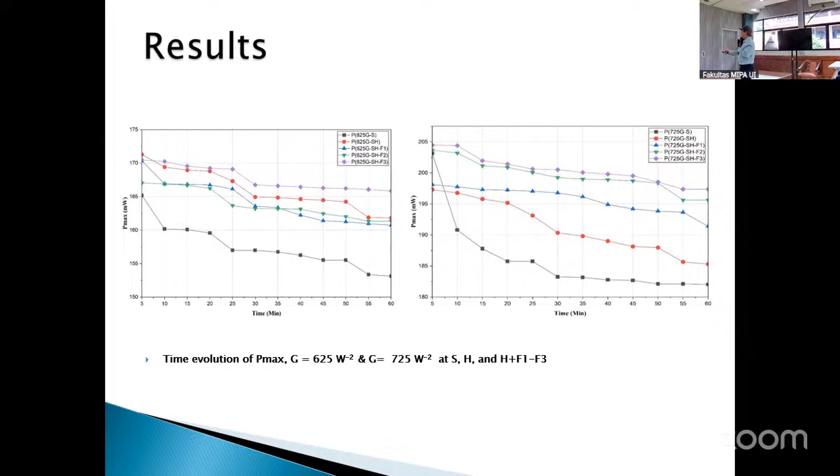And then we can see that, of course, a higher fan speed gives a better result in terms of power at different radiation levels. The result is consistent. The heat pipe with the higher fan speed gives a better result compared to the one without heat pipe. The lowest one is without heat pipe, all right?

Quick one. This one is also about cooling. It's battery cooling, because we want to study the effect of heat from the lithium ion battery and how we want to cool that. This is a battery. I think everyone knows the application can be anywhere. The application is quite broad. It can be used in the car, in the phone, in the computer and so on.

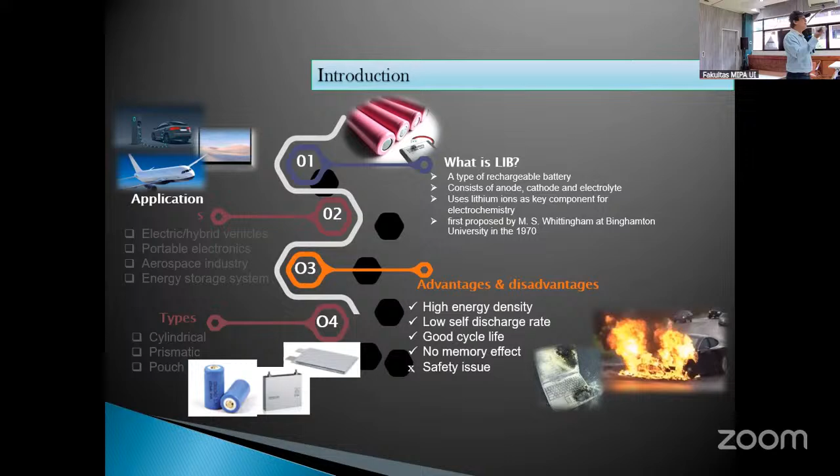Okay, but the danger is like this: it becomes flammable when it gets hot, it leaks, and then it's flammable. Therefore, it can cause a fire. Safety is a very crucial issue here. That's why if you take a flight, they ask you to remove your power bank, because they worry about this.

Okay, this is the electric car. I think everyone knows. Normally they put the battery right under the car. That's why everybody asks, if I buy the car and suddenly there's flooding, how? I say, if a normal car is flooded, you also need to repair it. It's not only the electric car.

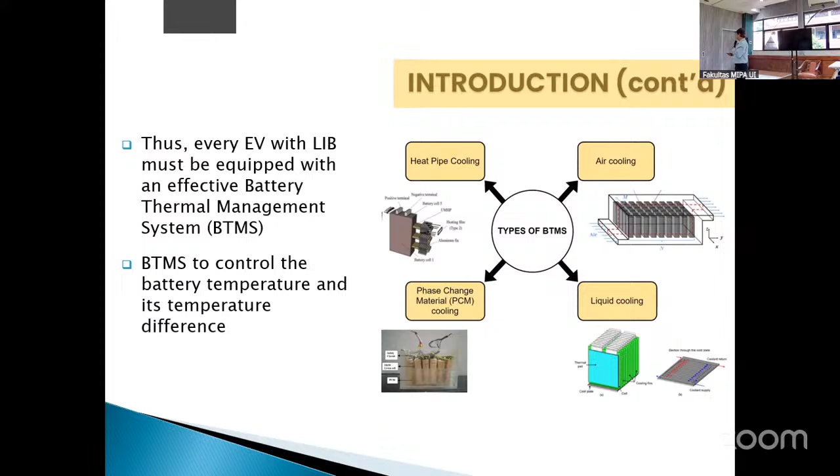This is cooling. This is a battery. There is a cooling pad, a cooling channel, right? Liquid passes through the battery. And then we also have air cooling. We also have phase change cooling. We have hybrid cooling, whatever you want to use.

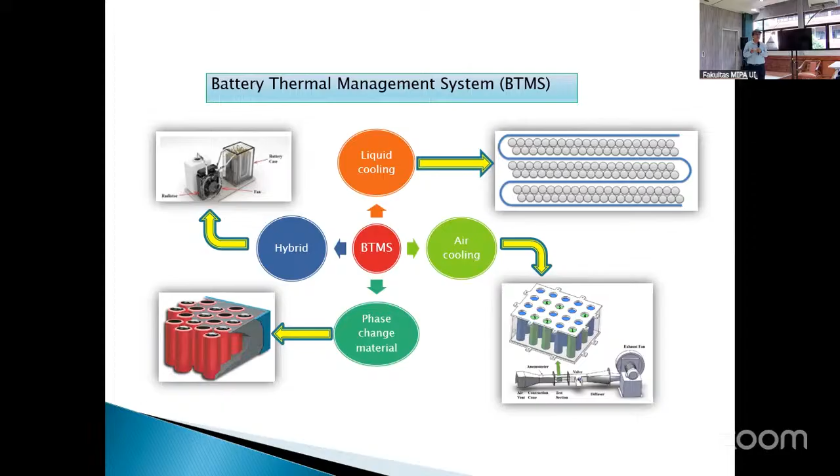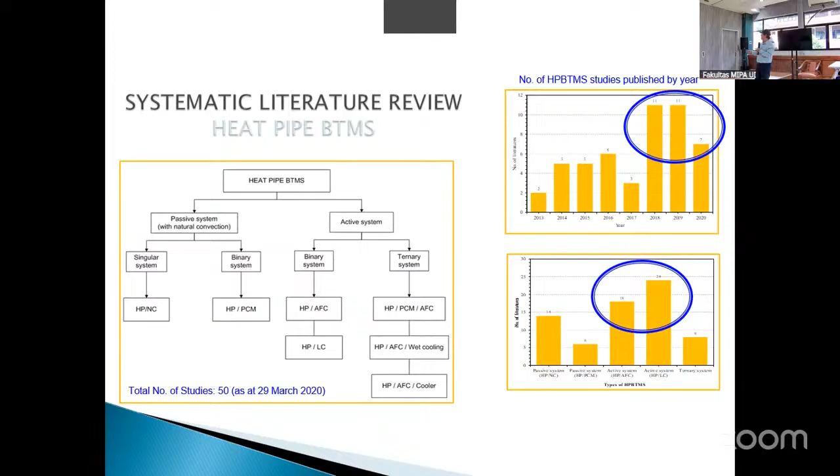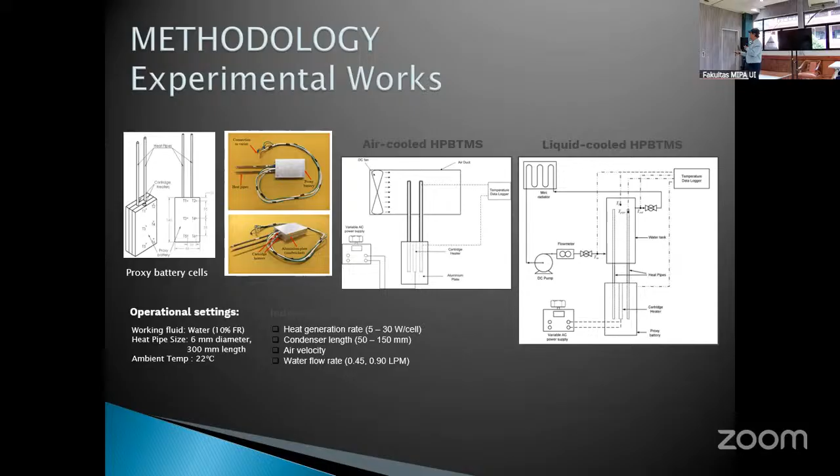Then we put the nanofluid inside the heat pipe and test it in our system, and we also do some simulation like we did earlier, to see how the phase change, evaporator, and condenser take place. This is the simulation of the heat pipe.

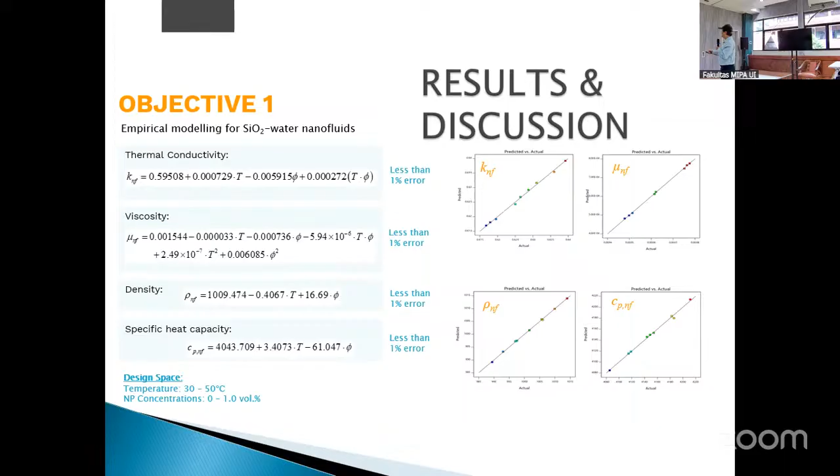We also do some calculations on conductivity, density, viscosity, and so on - these are properties of the nanofluid. Then we get results in terms of temperature, thermal resistance, and heat transfer coefficient. We can calculate it, and we see that using nanofluid with the heat pipe is better compared to the normal heat pipe.

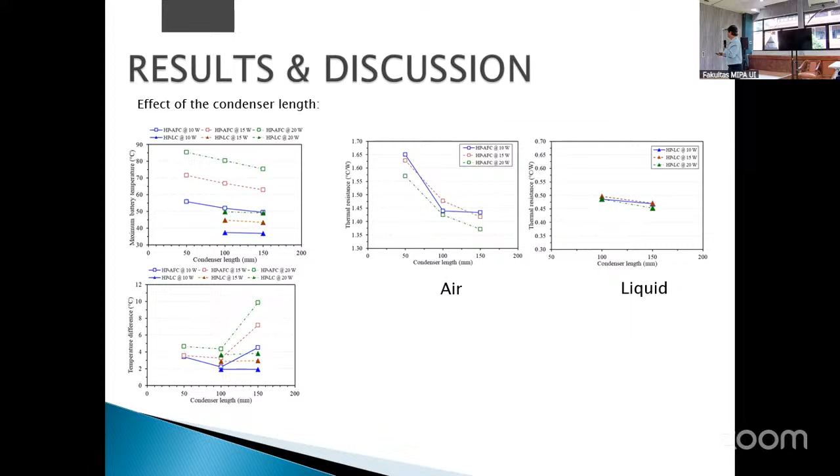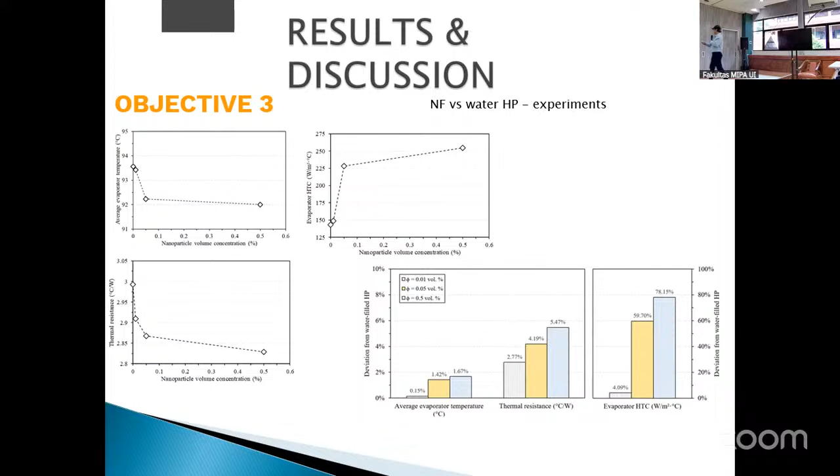This is objective number 3, nanofluid versus water heat pipe. Experimentally, we see the average temperature and deviation in terms of water, at different percentage concentrations: 0.01, 0.05, 0.5. The 0.5 concentration gives better heat transfer coefficient compared to water.

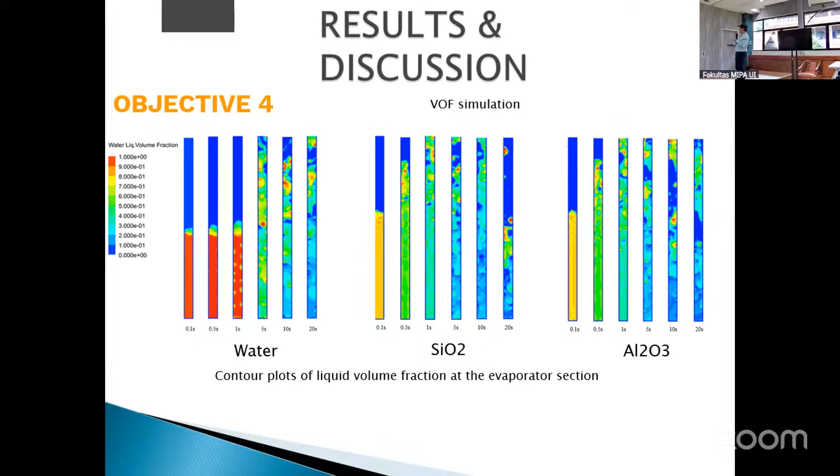This compares silica oxide and alumina to liquid water. Inside the heat pipe, similar to last time, this phase change takes place between water, silicon oxide, and alumina.

Water gives a higher thermal resistance, silica oxide gives less, and these are also almost comparable to alumina. The evaporator also gives a better heat transfer coefficient for both nanofluids. Okay, with that, thank you very much.

I hope - oh, we just go, just... nice. Thank you very much, Professor Zulkifly.